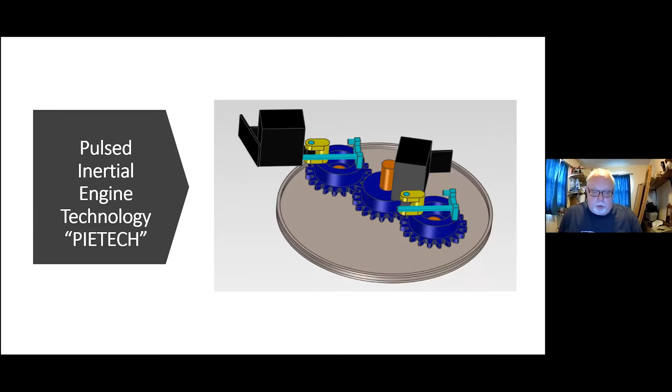That's basically the setup of a single disc which would be in operation. It is very similar in appearance to what we saw with Roy Thornson's inertial engine that was known as the EZKL, or Ezekiel, which stood for Energy Zoned Kinetic Lifter. Roy's story is available in print from Tom Valone—I saw him on here earlier—at the Integrity Research Institute. He's got much of that available for anybody that's interested.

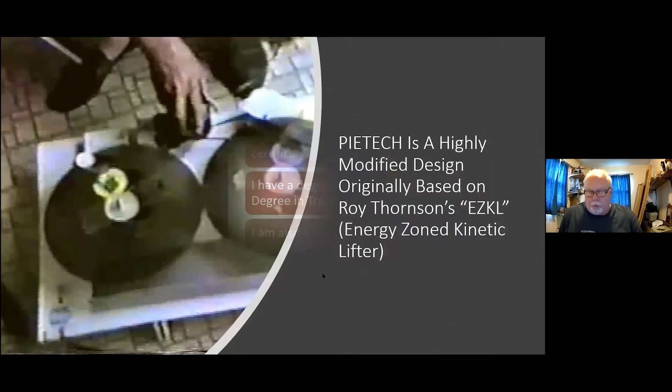First off, who am I? Nobody's really heard of me. Well, that's fine. I've been a full-time professional automotive technician for over 35 years. I'm a trained machinist. I hold a lot of certifications in both trades—automotive machining, technical machining, manufacturing machining. I have several degrees in auto repair, a main degree in auto repair, and a bachelor's degree in transportation. I'm also dual ASE certified, so I kind of do know what I'm talking about when it comes to cars and transportation and propulsion systems, at least as far as transportation on the ground.

I also have management training, and I've managed several garages of different sizes—fleet shops, trucks, cars, and everything in between. Years ago, I did a lot of dabbling in alternative fuels and alternative energy, and that led up to alternative propulsion systems. That's been going on ever since I was a teenager. Back in the 1980s, I built a cold vapor carburetor that worked really, really well. It unfortunately came at the time that carburetors were going away, as fuel injection systems and computers were coming on, so that kind of fell off the edge.

I was also trained in industrial model making. The head of a multinational industrial model shop was the one that trained me on how to do this. We worked directly with the engineering departments, and the engineers would come down, bring us prints, and we'd say, hey, we can't do this, can you make this a little different? We'd switch it back and forth, and we did a lot of back and forth that way.

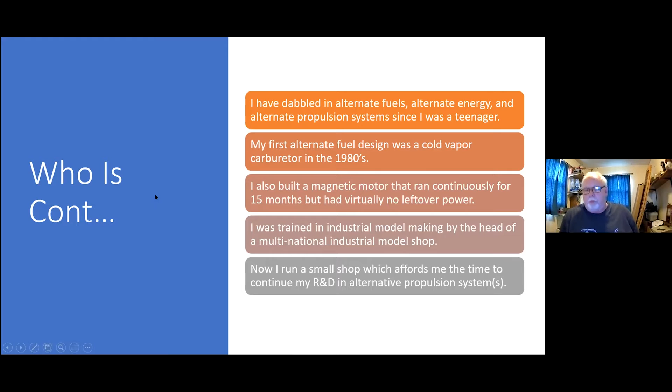Now I'm running a small shop that affords me a little bit of extra time to do this kind of thing.

So what is PIETECH? Pulsed Inertial Engine Technology is simply a propulsion system. It does not push on any physical media or eject any mass for propulsion via reaction. That's what we used to call reactionless propulsion, but we don't call it that anymore. There is no such thing as reactionless propulsion—everything has an action and reaction, whether it's internal or external.

The PIETECH system can be used either in a full atmosphere, a zero atmosphere, in full gravity, or zero gravity. We've done some tests during free fall, and we've done some tests with wind tunneling in both directions, side wind tunneling, and it works.

It just simply works. It can be used as a primary propulsion system. As it gets stronger and as it gets better, of course it's going to be a little bit more efficient in that area. Right now we're looking at it more as a supplemental propulsion system.

Think hybrid cars. This would be a system that could be added into any type of vehicle, especially if it's transporting people, whether it's on the ground or in the air. It really wouldn't matter.

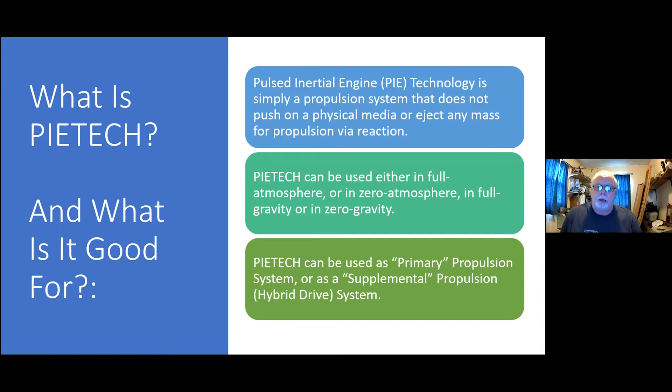Think about a hybrid airplane. There really is no such thing, but this could conceivably cause that to be a normal everyday operation.

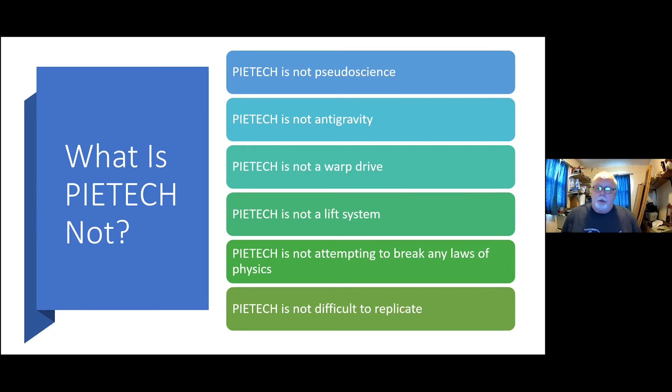So what is PIETECH? What it's not: pseudoscience. It's not anti-gravity. It's not a warp drive. It's not a lifting system. It's not attempting to break any laws of physics. And mainly, it's not difficult to replicate. Anybody can really build one if you've got a halfway decent shop and some mediocre, even technical skills.

I'm not here to prove anything. I'm not here to disprove anything, and I'm not here to argue the point one way or the other. I've got a tremendous amount of emails from people wanting to argue the point, saying this isn't possible. I know I've spoken with Mike Gamble, and he said the same thing—he'll gladly answer anybody's emails as long as you don't start out with, 'you're breaking the laws of physics, this isn't possible.' So I fully understand where he's coming from with that.

This presentation will not include—these are very important points of what we're not going to talk about—untested theory. If it's not been tested, I'm not going to talk about it. Everything we're going to discuss has been tested and proven. So we're not here to prove anything, and we're not here to discuss untested theories.

I'm not going to go down through the mathematical formula. It's pretty simple. The problem with the mathematical formulas we've got right now isn't that they're incorrect—they're not—they're incomplete. They're put together incorrectly for what we're doing with this. So that's why mathematically this shouldn't work. But it's not that mathematically it shouldn't work, it's that mathematically it's not been shown why it can work.

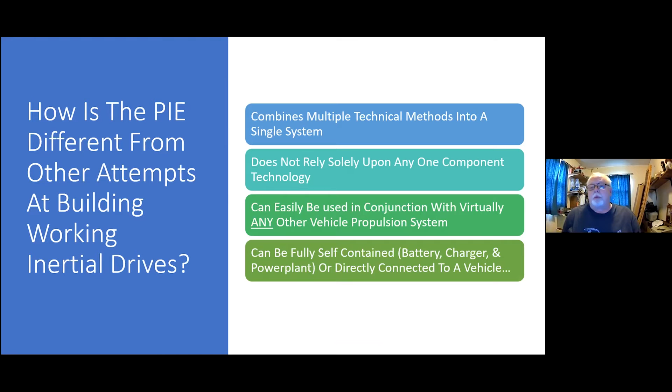I wanted to do a quick timeline of the PIETECH project's development up to this point.

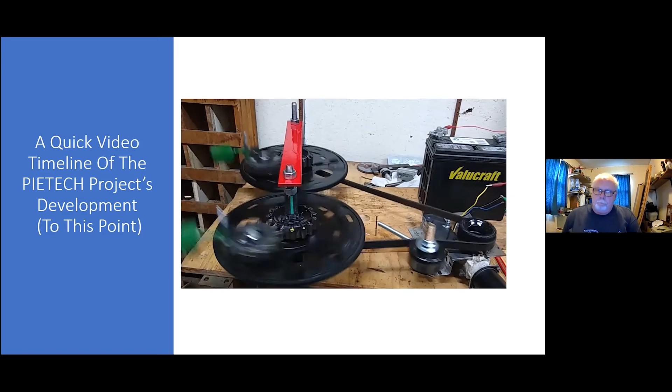On to the next model. This is where we started calling it a PIE, not just a Thornson Ezekiel drive.

One of our projects has actually been worked on overseas. Tokyo Muramatsu, he's really helped a lot. And I thought this was an incredible little piece of video.

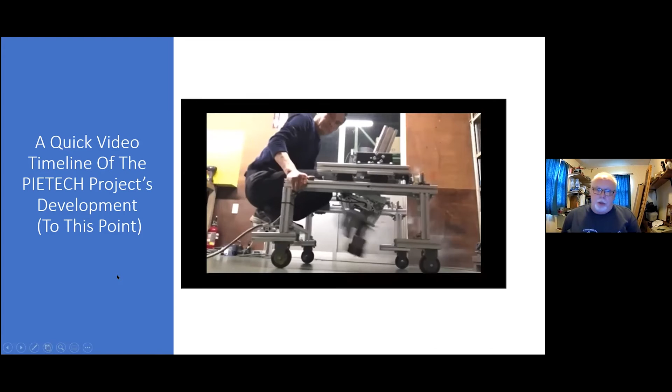This was the first time I ever saw anybody ride on any kind of an inertial propulsion system. It was just absolutely amazing to me. And this is where he is actually developing it a little bit further and a little bit further.

That is his ongoing project at this point.

This was the first time that any of them had been really videoed mounted in a motor vehicle. We were getting ready to do our first road test. That's that same unit before it was mounted in the vehicle.

And on to the system that we're putting together now, which is the 4 series PI systems. We've made some considerable improvements since the originals.

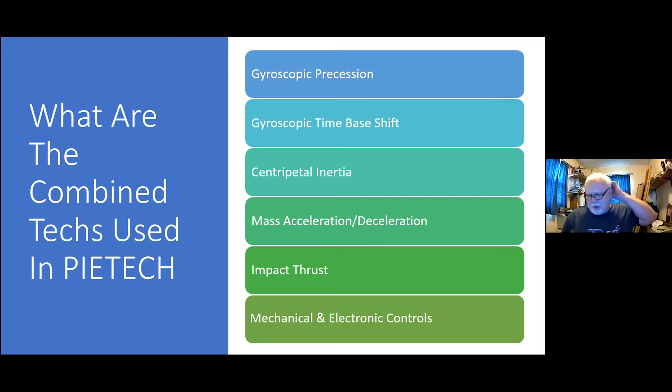Those are the things that really make this a lot different than some of the other systems that have been out there. We'll cover what those items are and how they're in play in the system.

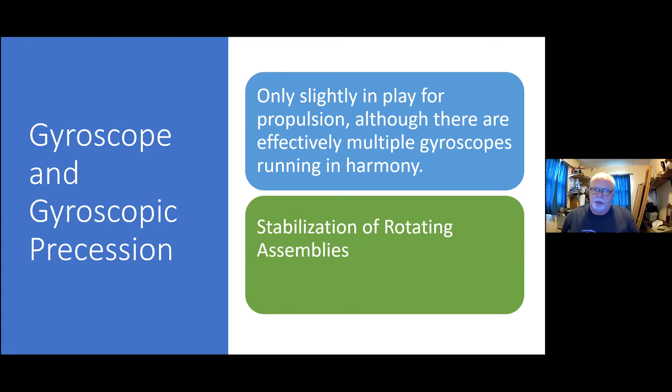The gyroscope and the gyroscopic precession are only slightly in play for the actual propulsion of the system. There are effectively multiple gyroscopes running in each unit, and it really works more for stabilization of the rotating assemblies than for the propulsion itself, although it does play into the propulsion.

A 4D gyroscope - gyroscopes with a time base or velocity shift - these have been shown to have some serious different effects, not just the standard gyroscopic effect of stabilization. The alternative gyroscopic phenomena tend to present themselves when the time shifts and velocity changes are introduced.

And without them, even with the other technologies, the time shift is part of the system that makes it work as well as it does.

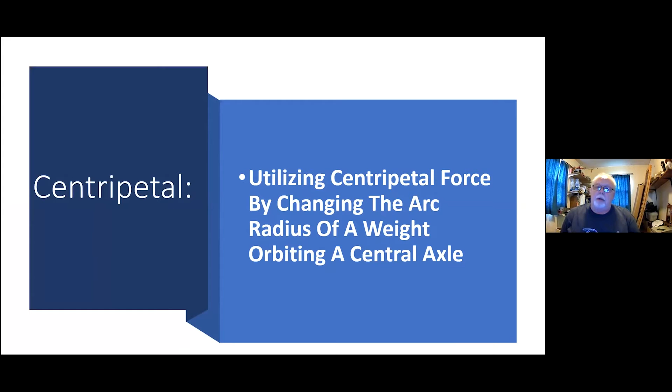The mass velocity changes also were happening in Roy's system, and we've really expanded on that quite a ways. The reciprocating mass accelerates and decelerates during each cycle, not only when it comes to the center and touches off in the center, but also when it gets to the outside. It also slows down as it approaches center and speeds up as it leaves center. So we've got some serious velocity change going on there.

The acceleration and deceleration of the mass is because of the position in the cycle. The acceleration and deceleration of the mass is caused by the rotational speed change, which is the speed differential control.

That's the electronic control that we've added, which boosts the speed just about the same time that you would normally see it slowing down because of motor load. And then we have the sudden deceleration of the mass due to contact with the stops.

Years ago, Roy called those stops a whole different set of things. He never even used the word stops in his system. We use stops. They're not brakes.

They're not traps or anything else that he used in some of his dialogue. The impact thrust, that's got an awful lot to do with it. I know Tom Valone spoke about the impact thrust having a lot to do with Roy Thornson's system. That is the thrust caused by the moving mass impacting another portion of the assembly. The mass impacts with the center axle, pushing everything forward. It impacts again with the planet gear mounted stop, with the outer stop, which we've improved dramatically as well.

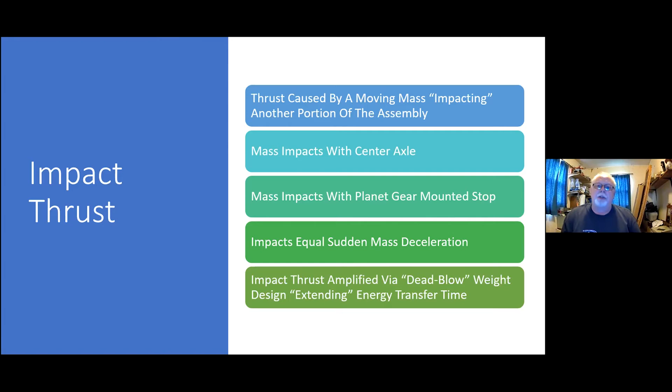The impacts equal sudden mass deceleration, and we have changed those weights to not simply be a weight as such. It's not just a hunk of metal going around. It is actually a dead blow weight, much like a dead blow hammer would be. It's hollow, it's filled with shot, and that effectively lengthens the amount of time that each impact has effect on its stop.

The mechanical and the electronic controls are pretty straightforward. The mechanical control uses the planetary gears to continuously modify the moments of inertia and the mass velocity. The mechanical stops therefore cause impact and mass deceleration.

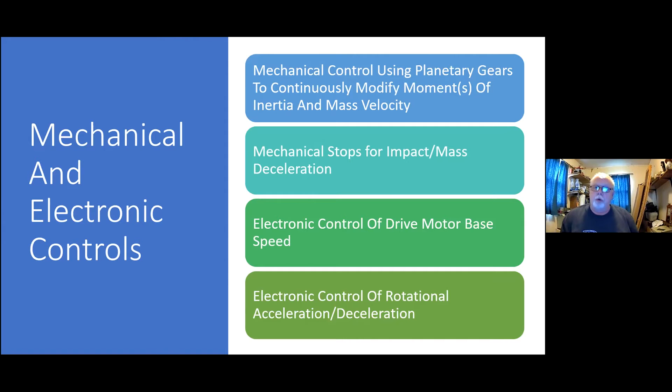The electronic control of the drive motor sets base speed. We have a very simple speed control system with the speed differential controller on it, which is the electronic control of rotational acceleration and deceleration. So the whole unit speeds up and slows down, depending on the design of the unit, 2 to 4 times per revolution.

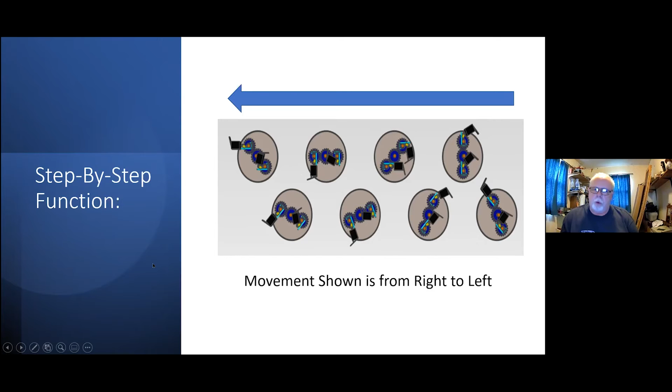Step-by-step function of it. This was a picture generated by my friend Tokio, and this shows basically starting out. We've got one weight out front. This is the progression as the unit is trying to move forward. It's moving from right to left. It's a little bit hard to follow because it's not in motion in the picture.

So I wanted to show this quick little orbital cycle. This was also generated by Tokio. This shows the actual cycle of a single gear and weight assembly. It impacts center, comes around, and impacts the outer stop.

Again, this is in motion from right to left, and depending on the speed of the rotation would depend on the timing of when it would impact the center and impact the outer stop. The outer stop is fully adjustable, so we can actually change that correlation between the time when it hits the inner and the time it hits the outer.

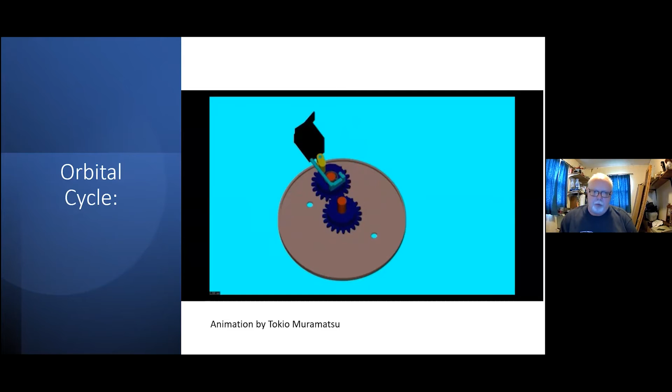We'll go through it real quick. In position 1, in the center, when the weight is in the center, it's contacting the center axle and comes very near to a stop. This is where it would impact the center on the left, with the weight not in rotation anymore. Momentarily, it hits that and simply stops in its rotation.

This particular series is moving from left to right, and you can see that it would be hitting the center and pushing the assembly to the right. Then as it leaves that center position, this is where the power stroke really begins. That's where the power of the electric motor that runs this is really under its heaviest load. That's also the place where our speed differential control starts speeding everything up.

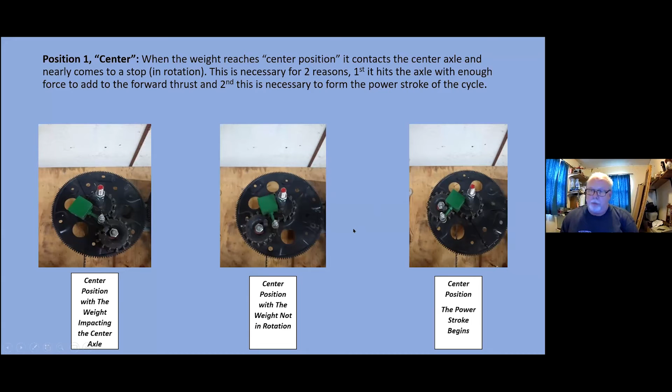Position 2, that power stroke, as I was just saying, the movement is sideways to the direction of travel. Therefore it has little or no effect. That means that when it's swinging out here, it's trying to push sideways. It's not moving forward or back.

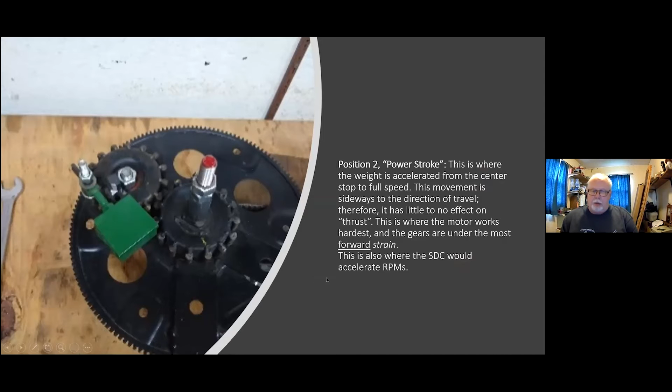That's why 2 wheels in counter rotation work so well with this, because it counters that. It has little or no effect on the actual propulsion. It does add to vibration if we don't use a counter rotating unit. That is exactly where the speed differential control would accelerate the RPMs.

As it comes up and hits the outer stop, this is the older design outer stop. We had a simple metal block welded to the gear and another metal tab welded to the backside of the swinging weight assembly. It would come up against this and it would literally just jerk the whole gear in the direction that you want the unit to move.

This generally just converts that unit into that unidirectional thrust. This is also where the gears are under their most reverse force and where we've broken a lot of gears. That's why we're using gears that we can throw together, we can tear them apart, and if we blow them up, we throw them away and we don't worry about the cost.

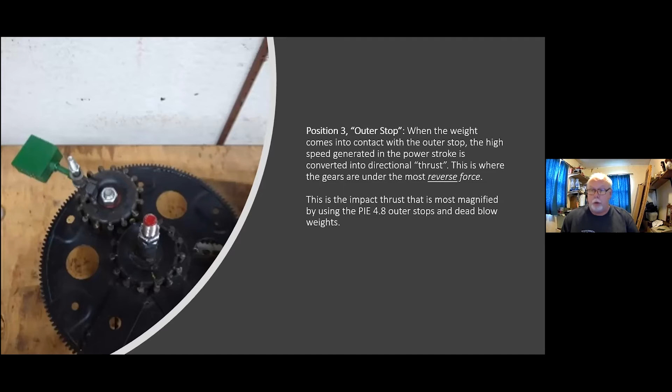When we started out looking at machine shop gears, the cost was going to be very prohibitive as soon as we started realizing we're going to start blowing gears and tearing teeth off of gears on these things.

Position 4, when the thrust begins, it continues until the weight reaches a point at or near just past its apex, the apex being considered when the weight is furthest away from the center axle. At this point, that's where the speed differential control has released. It's returned the RPM of the whole rotating assembly back to its normal RPM setting.

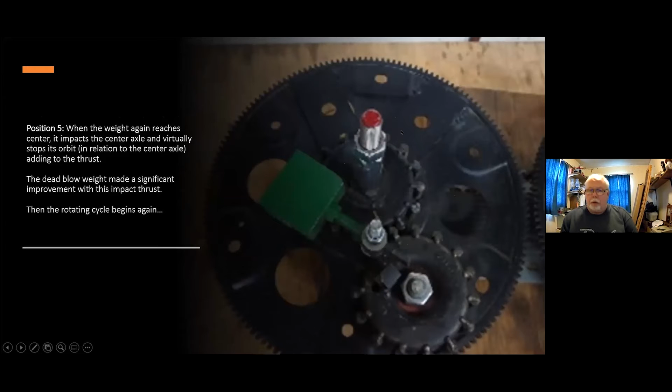In position 5, we're coming back around. We're basically done propelling. You could really look at this as reset. It's resetting to do the job over again.

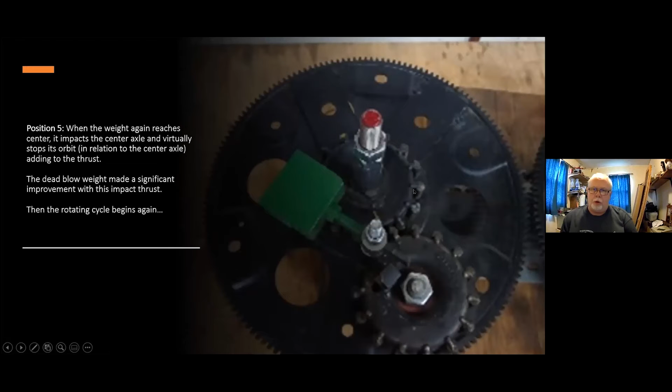So during this period of time, if we had another set of gears and wheels in operation, this was when they would help take up some of that pulse so that it wouldn't pulse as badly, and performance, of course, would be greatly improved. The dead blow weight, I'm telling you, that really made a significant improvement. That was a game changer with this whole thing, because when it hits, that dead blow weight just really helps out the propulsion. And at that point, the rotating cycle begins all over again.

Adjustments are really critical on this. When I say they're really critical, gross overall adjustment is very critical. Minor adjustment is, but it's not - we can tweak it and peak it and get a little bit more power out of it with the minor adjustments. But the first important point of adjustment is the outer mechanical stops.

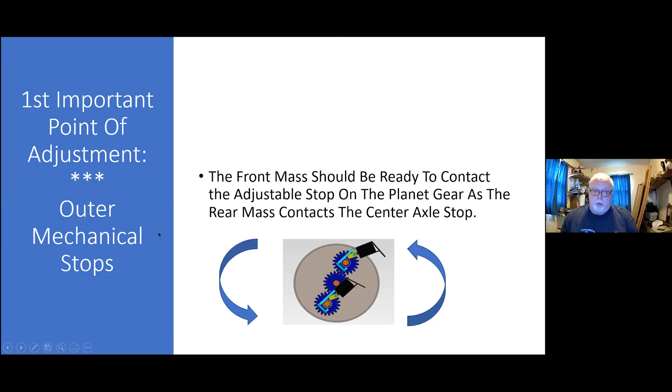At the point when we're generally using 2 weights on a single wheel on our units, at the same point when the rear one is contacting the center, that's just about the time when the front one is about to or has just started to contact the outer stop. That actually doubles up on both of those impacts, so we're getting 2 impacts for the price of 1. It really has been, like I say, another game changer.

The second important point of adjustment is exactly where in the rotation everything comes to that impact. Generally, it's going to be with the forward weight in the 20 to 45 degrees before it gets to apex. That has worked out really the best for us.

I know Roy talked about that in some of the things that he wrote. He was of the impression that 30 degrees was just about right. I've found that it really does depend on how heavy the weights are, what type of weights you're using, and how fast you're rotating the entire unit.

It is speed dependent. It does work at very low RPMs. It also works well at reasonably higher RPMs. What it does not do is it does not work well at very high RPMs.

So this adjustment is made by adjusting the position of the sun gear. Basically, we unlock the sun gear and rotate it, and that simply repositions where the weights are going to be hitting their stops.

And like I said, this is an adjustment that's not so much made by how many degrees before dead center, before apex. This is an adjustment that is made by performance. And performance, at this point, we're measuring a lot of our performance using a force meter, an electronic force meter, so that we can see forward propulsion, rearward propulsion, and we can even hook it up sideways and see how much sideways propulsion we're trying to get rid of.

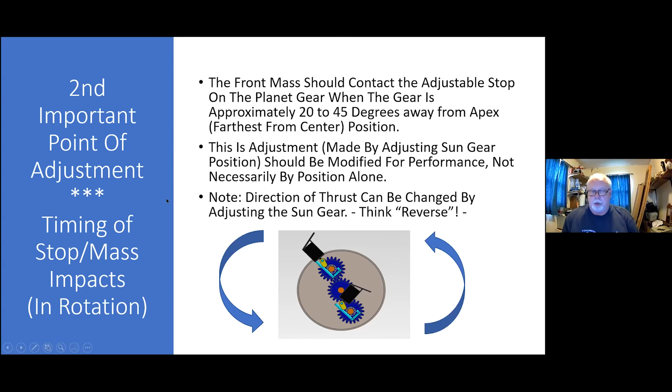Nice for a braking system, nice for a positioning system, terrific for sideways movement because it can be repositioned in any direction that you would want, 360 degrees around.

The third point of adjustment, the speed differential control, speeds it up as it gets into its power stroke, so to speak. That's adjusted to increase the rotation speed when the rear masses are just about ready to leave the center axle stop. This is easily identified using an ammeter, especially if it's hooked to a lab scope. We can identify the exact position where that speed differential control should trip in by the exact moment that the motor amperage starts to rise.

The speed increase cuts off just before the mass reaches its apex position. That is nowhere near as important as when it begins. It's nice to have it maintain the higher RPM until it gets just about to the apex, but if it stopped a little sooner or a little bit later, it really wouldn't make as big of a difference as it does when it starts increasing the speed.

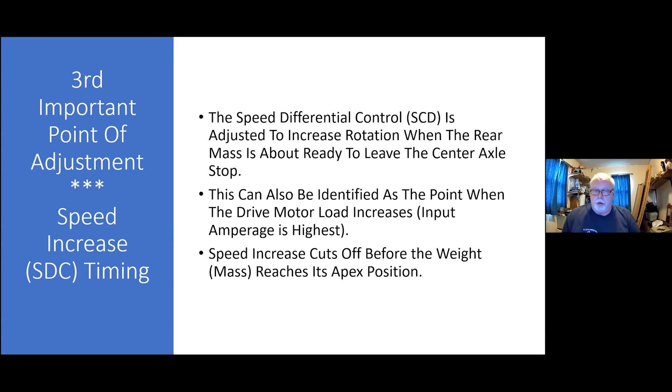The fourth point of adjustment, the RPM adjustment itself. The speed differential control should be a 75 to 100% increase above the base RPM. So if we're running the base RPM at 100 RPMs, it should raise that RPM level to 175 to 200 RPMs just for that moment of increase.

The optimal RPM settings are yet to really truly be determined, and they're currently being adjusted by monitoring performance. The bigger and heavier it is, the slower it likes to run. The smaller and lighter it is, the faster it likes to run, but only up to a point, and then it becomes self-destructive.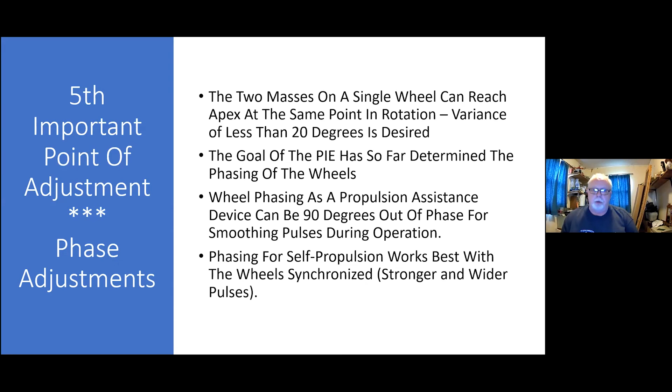It does create a little extra side to side vibration to do that, but it also helps as a hybrid type, a helper pusher design. If it's made for self-propulsion without anything else helping it move, then pulsed all at the same time, synchronized very closely, is really the better way to go, as it simply works much, much better.

The important noted observations, 7 of the most important ones that I wanted to speak about real quick here. Phasing can be changed, obviously, depending on usage, as we just spoke about, whether they're phased together, or phased 90 degrees apart, 45 degrees apart. The more wheels you would use, the phasing could be changed for smoother operations.

Multiple components, they all have to work together. If they're not adjusted properly to work together, it's just going to tear itself apart, and we're not going to get any propulsion out of it.

The stops, all the stops, have to transmit impact very firmly. They can have padding on them to reduce noise, but too much padding and the impact is also diminished, and therefore so is our propulsion.

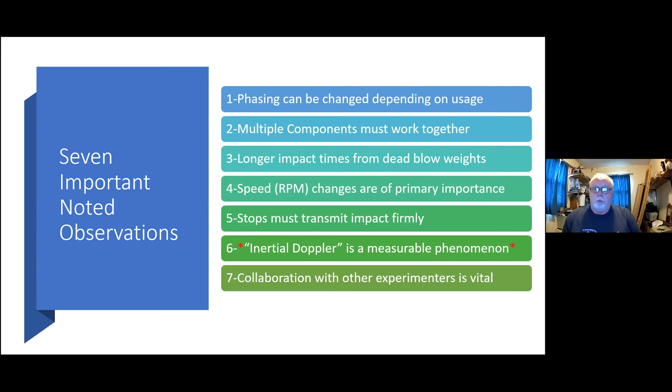The terminology of inertial Doppler might not be technically accurate, but the fact remains that the faster a vehicle is traveling with a PIE unit in it, the stronger the PIE becomes. Is that caused by an inertial Doppler effect? Are we actually making a Doppler effect, pushing energy out in front of it? Or are we simply pushing harder against its own mass and causing a stronger pulsation? Either way, I'm not 100% sure which is true. We've got a lot of testing to do before we'd absolutely know one way or the other.

If I was to indulge in a little conjecture, if any energy manipulation is involved with using and recycling inertia, those energy fields could exhibit a Doppler-like effect, similar to what Michael was speaking of with quantized inertia earlier. More study and testing is necessary—we need to understand this a lot better. The effect is experienced in a moving vehicle. It's measurable, it's undeniable, it's there, it's real, it's true.

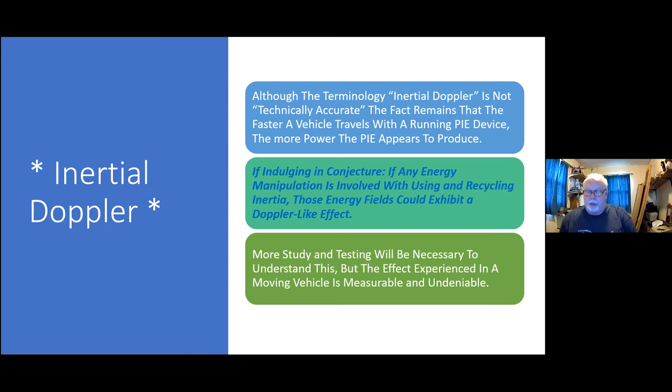The design changes from the early days to where we are now: we had counter-rotating and same-rotating units, ones driven by a timing belt side to side, and we used the double-decker design with a roller chain drive. The roller chain drive was another good change, since there can't be any slippage and timing is always held much better with a chain. The belts, with their soft teeth, sometimes tend to slip a little, or have a bit of deflection, which caused some problems.

We've added ramps on the ends of the weights. They serve two purposes: they hold the weights in center a little longer, and they keep the ends of the weights from jamming against the center pin. If you go back and look at videos of Roy Thornson with his demonstrator units, he had that same problem. This has completely eliminated it—we have zero jamming anymore.

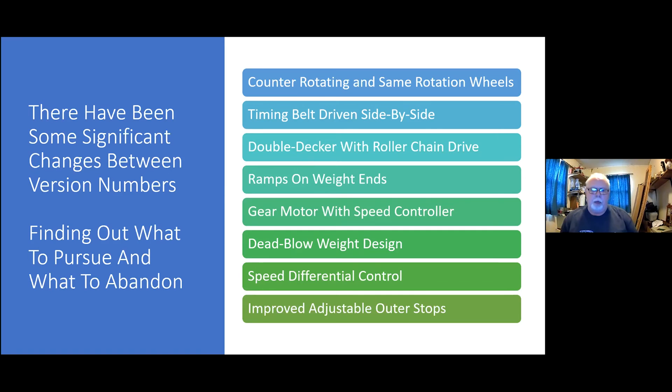The gear motor with the speed controller was a huge improvement—it's strong, smooth, draws very little power, and is very reliable. The dead blow weight design increases the amount of time each impact happens, which was a real game changer for the overall design. The speed differential control, adding that fourth dimension to the gyroscope—time, alongside height, width, and depth—has been a real big deal. And finally, the last major change was the improved adjustable outer stop system, which has really improved how energy is transmitted during that outer stop sequence.

Just a few pictures of the different ones: we've got the counter-rotating, and then the same rotation. We've got the double-decker, and that leads us up to where we're at right now with the PIE 4.8.

In the picture, hopefully you can see my cursor—we've got the gear motor, and we've got the new improved outer stop design. This way, when the weight comes around and hits the end of that bolt, it's adjustable so we can change the timing between when it contacts the center and when it contacts that outer stop. Those are all big improvements in the way it works.

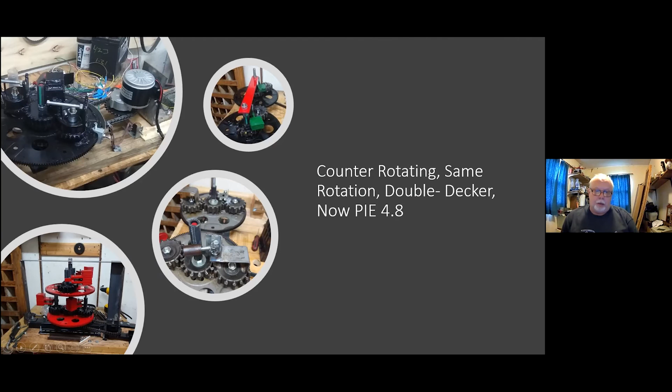And right here you can see the actuator for the speed differential control—there's actually a micro switch. We're not using sensors; this is plain, simple electrical, no electronics other than the speed controller. Just a plain micro switch on a ramp-type actuator.

Things that didn't work - I like to talk about the things that don't work, because if I only talked about the things that do work, I'd be an idiot, that's all there is to it. We all have things that we try that don't work, and if we ignore those, we don't learn and we don't move forward.

The things that didn't work well or didn't work at all: the very high speeds are very destructive. At this point I've not had one that runs at a high speed that will actually hold itself together long enough to self-propel. Three weights per wheel sounded like a great idea at the time - making a triangular pattern with 3 weights, 3 gears rotating on each wheel. Did not work out well.

Torsion springs on the weights, to allow them to hit a little harder and hold things in place a little longer - again, not a great design. The soft tooth quiet gears, we tried that to reduce the amount of noise these make, but unfortunately they've got too much deflection in the teeth, and we would actually slip timing. We had some internal crashes and a lot of broken pieces.

Magnetic weight swing controls - this is something Roy Thornson was experimenting with, using electromagnets. He called them planet traps because of the planetary gear system, and he thought he was trapping energy and then releasing it when he needed to. They just did not work out well.

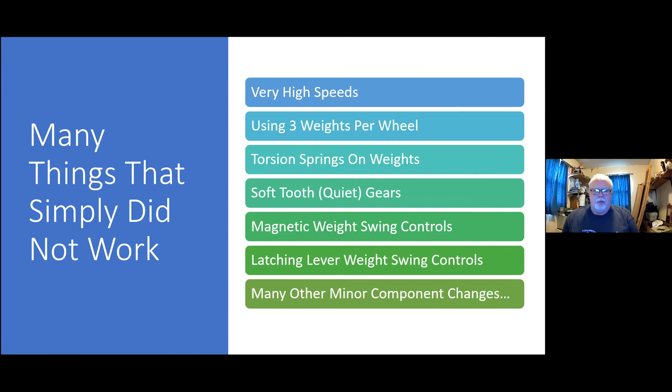We've had a lot of really small component changes, most of them running changes that we don't even consider. Looking back at the notes, it's like, oh gosh, I forgot we even tried that. They were almost inconsequential.

The general specifications right now: we're using a 14-inch diameter wheel, the masses are 2 kilograms each, and we're using a Chinese-built 350 watt DC motor. It's designed to run 24 volts, but it will run 12 volts just as well. It's basically an electric bicycle motor, so it's designed for long-term operation and some pretty hard use.

We're using a pulse width modulated motor speed controller - it's a cheap unit, simply inexpensive off-the-shelf components. We're using number 40 roller chain and sprockets for the drive, and right now we're using about 60 watts of power consumption.

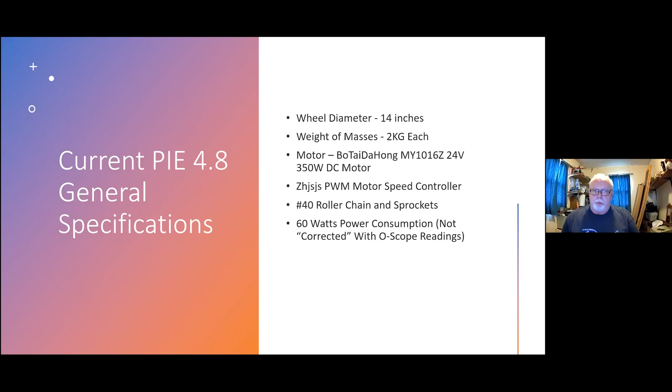I have not personally put my lab scope on and verified that root mean square would actually show that 60 watts is our maximum, but averaged out with a meter, 60 watts is where we're running. So that's really not all that bad.

As a quick recap, thrust is generated through a combination of impact, mass displacement, centripetal force, and the 4D gyroscopic flywheel.

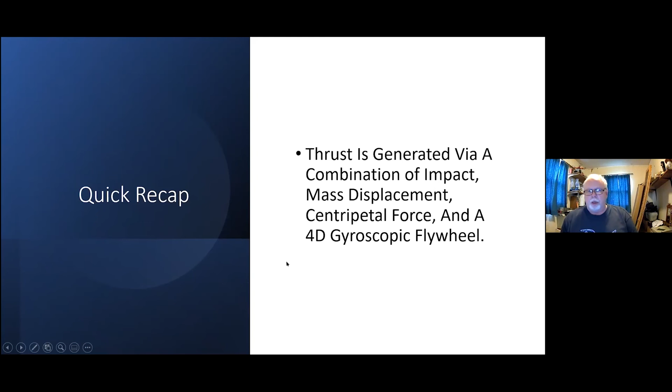Where we're going from here: the testing, research, and development is continuing, and we're continuing to improve the designs. We are making all of the technical details 100% open source, public information - it's available on my website. There'll be a link shown in a few minutes, and I can always put one up in the chat. With enough design improvement, I think we really are going to have a unit that will actually leave the ground, and that will be a truly exciting moment when we can video a unit pulling itself up off the ground.

A few last minute additional things that weren't originally in this - I wanted to mention there's a swing test video online now. A lot of people have asked me to put the unit on some sort of hangers so they can see it move without any kind of friction against the ground. I don't agree that this is a perfectly good way to do it, but it passes the test, and the video is online.

Because it's a pulsed system and because of the length of the hangers, we had to slow it down. So yes, there is some swing back, but it will hold in the positive direction 2 to 3 times longer than it will swing back for. It simply works, that's all there is to it.

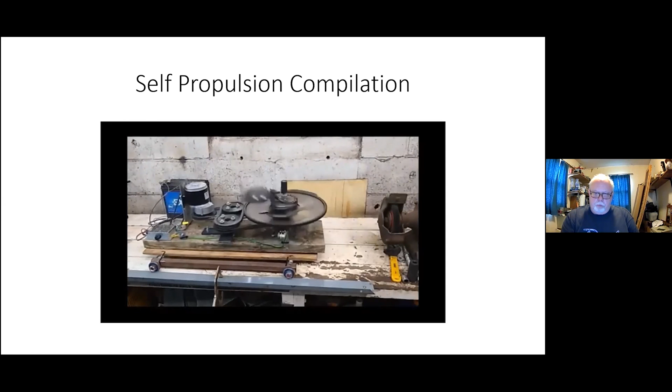So now, even without the speed differential control operating, yes, you see. Now with it...

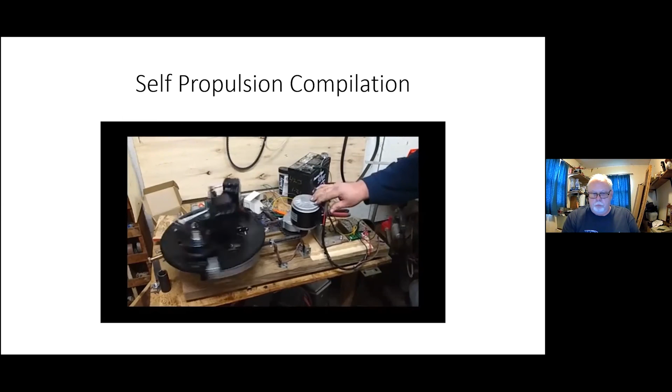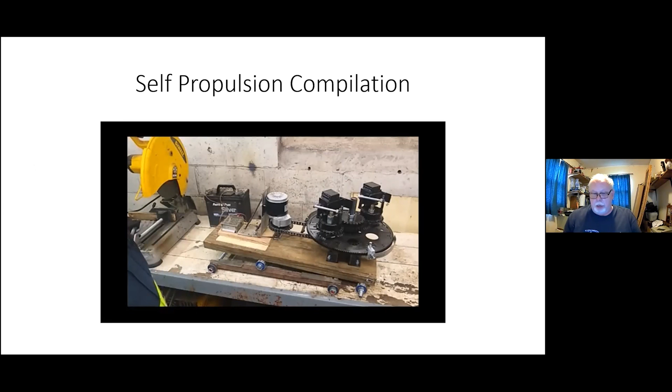I do, I call that a success. I know some people insisted that didn't show anything, but the carriage underneath it actually rolls easier than it does. It's not pushing on it, it's not pulling on it. It shows definite self-propulsion.